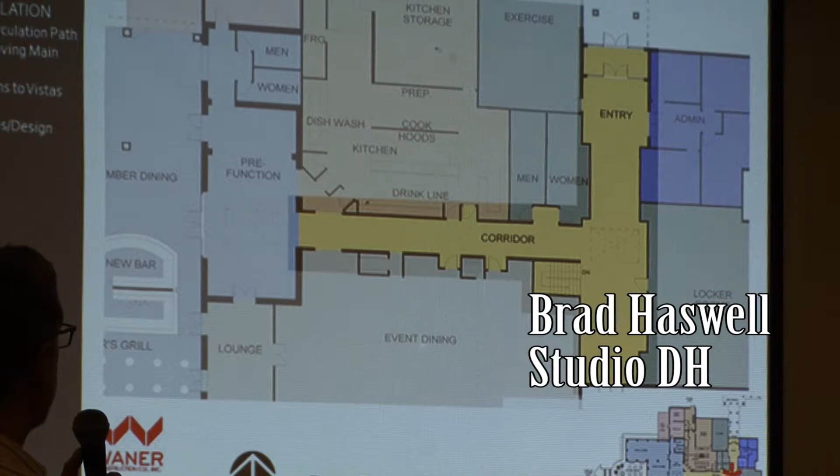The administrative areas: there's an existing coat closet here that we're commandeering and adding to the administrative area, since there's a need for another office or two. That space is also being pushed out into the hallway a little bit to gain a little more square footage.

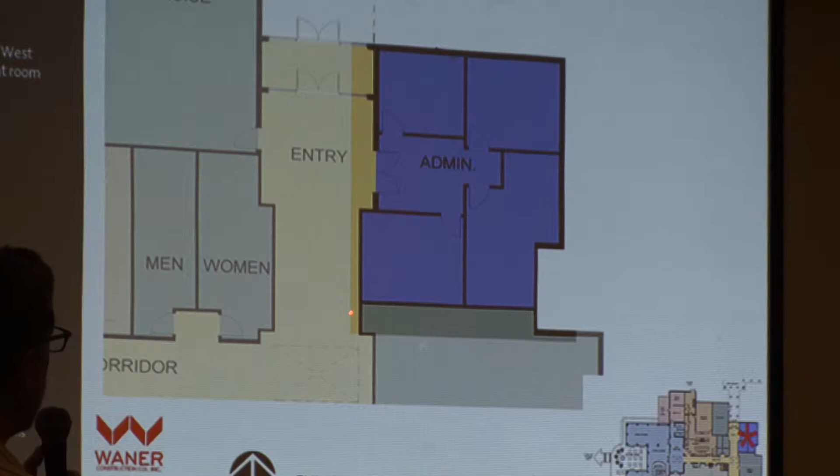The men's locker room: right now when you come in the front door, there's a hallway that goes out towards the pool area, and we're proposing to take that square footage. That door and hallway tend to not be used very much, so we're going to use that space to add to the locker room - additional full-size lockers, additional half-size lockers, as well as reworking the shower and toilet area.

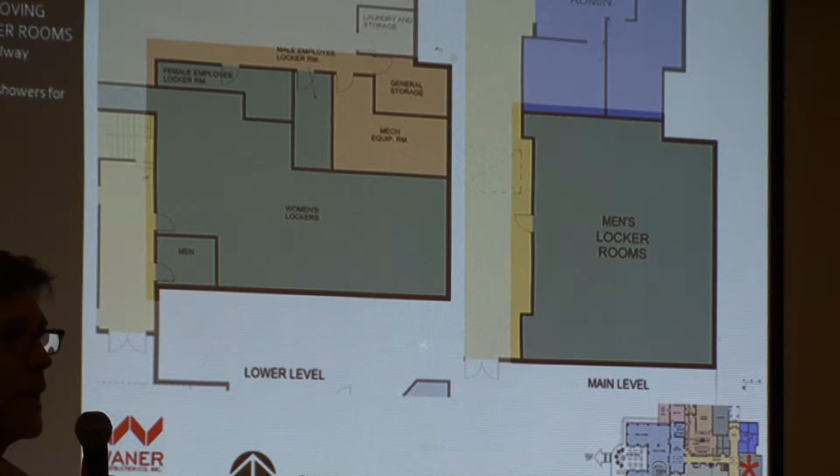Everything has to be brought up to code. We have ADA and handicapped accessibility requirements, so all of that will be brought up to code and meet current ADA standards.

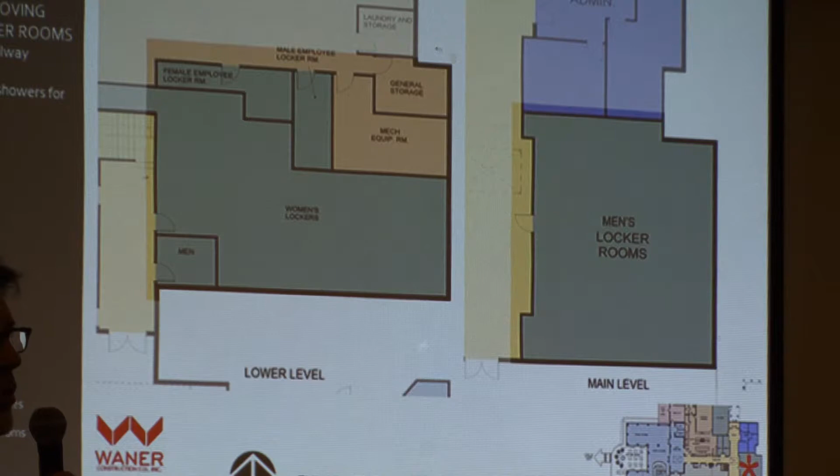In the women's locker room, some renovation has been done recently, and what we plan to do is build on that. In general we want to add in this area, and the big complaint we heard is that there's just not enough lockers in the women's locker room, so we're going to expand that area and get more lockers.

And then back upstairs, this is the exercise room we're in now. It'll have new athletic flooring, mirrors, and we intend to fill that space up with exercise equipment. It's a decent size exercise space that I think will function really well.

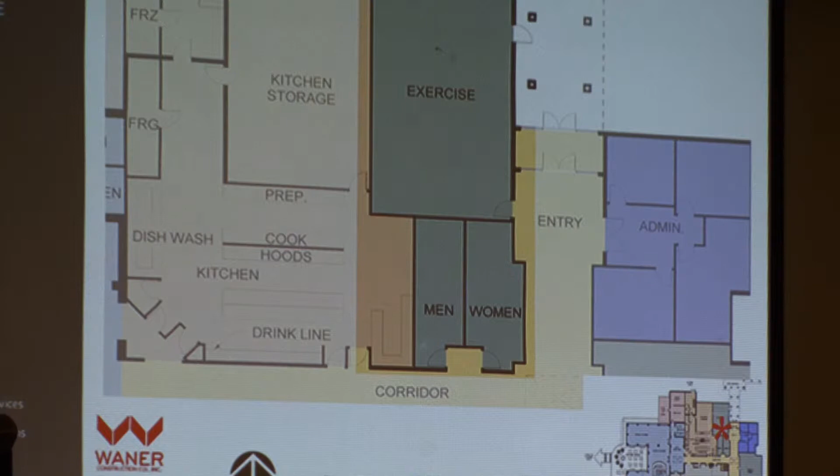I should also mention that as part of that, these restrooms will be enlarged. Right now they only go back to about here, but with all the additional dining space, we need additional restrooms. So this is one area we're doing that, and you'll see another spot where we're adding restrooms as well.

The event dining: this is now being opened up, and we feel that space has plenty of room to accommodate 200 plus people, plus a stage, plus an area for a dance floor. Part of how we're doing that is the porch that now extends to the south - we're planning to enclose that and capitalize on that space. This area over here can also be used if additional space is needed.

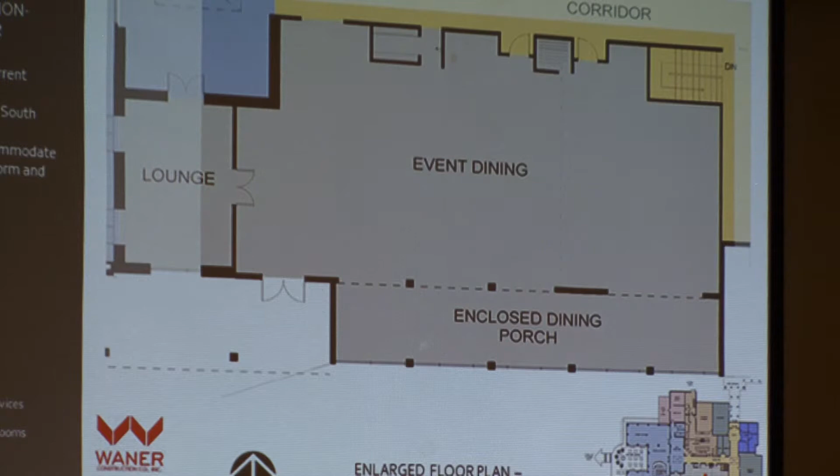This is the kids area we talked about before. We're proposing a game area and just an open play area, and then to the west is an outdoor play area with a fence. That can be directly accessed from the member dining area right here.

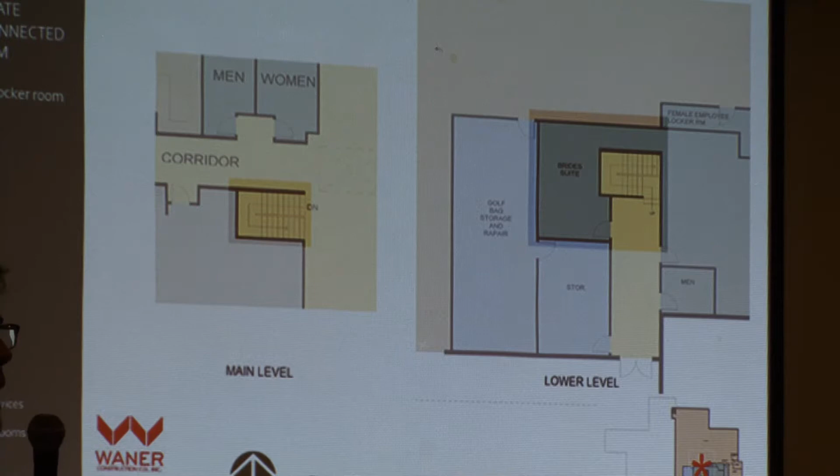Downstairs, the other thing associated with the women's locker room is this bridal area. We're capturing space downstairs, and as part of relocating that stair, it bought us a little bit of square footage. So we have this bride suite area with its own entrance off the hallway, and it also has direct access back into the locker room - we felt that was an important amenity.

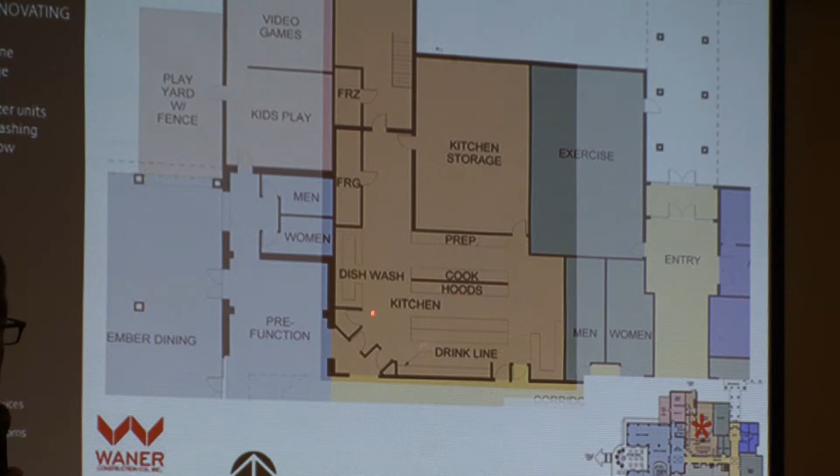What we've been hearing is that when there are multiple events - if there's a wedding happening and member activities going on at the same time - the kitchen couldn't keep up with the demand of doing both. I think this will vastly improve that situation, not only handling more quantity of food, but we hope we're able to keep providing the great food they do. So there's also additional dish washing area in here as well.

So here is the whole member event space that we're talking about on the west side, and a lot of time and thought has gone into this to this point. This L-shaped piece here is that existing covered patio that you guys have on the west. So what we're proposing is to enclose all of that space and capture that as year-round space to be used for dining.

Then in this middle area here, you come down the hallway. I should also mention that dark area you see here is the old ranch building. We are keeping that, and I know it's been a challenge to figure out what to do with that space in the past, but we feel it works great as a pre-function area into this member dining and bar area. We still maintain some of the old character, those old wood beams. We think it's great to hang on to that.

So we pass through here. We are proposing a new skylight in here to brighten that up a little bit, and come into the member bar area and directly out. These walls are movable walls, so in the summer, when the weather's nice, that entire wall can open up and feel like it opens directly to the outside. We've got those here, here, here, and here, and we really want that space when it's nice out to really open to the outdoors. I think that's a fantastic benefit of this space.

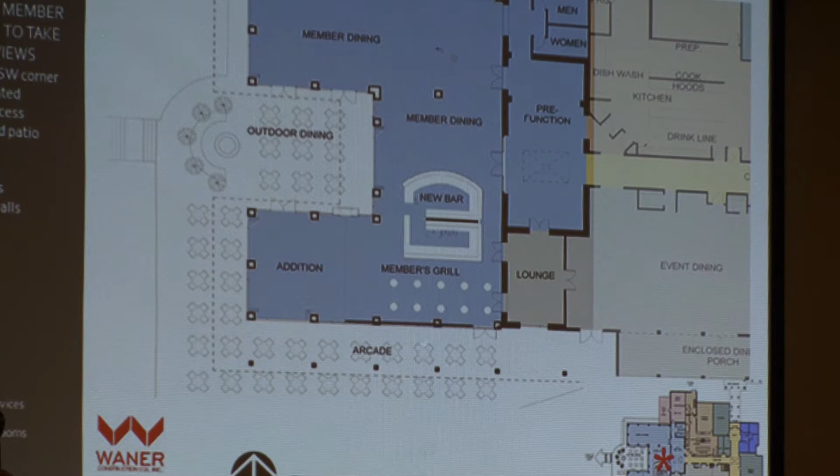And then at the very end of the circulation, we are proposing a fire pit out here. You'll see in some of the renderings we've got lights that span across there, so this will be a fantastic place to hang out in the evening as well.

So here's some of the images of the inside that we're proposing. This is, I guess you'd call it the southwestern portion of it, and this is where we are proposing the addition. So all of that area is new, and we're expanding that out to the west.

So this is standing - these little key plans I know are small and hard to read, but this is from that back corner looking at the bar and out to the west.

So we're building on what you have, so we are proposing adding these beam structures with an arch. We've got lots of arched windows, so we like building on that, and we think it's going to add some character and some depth to this room.

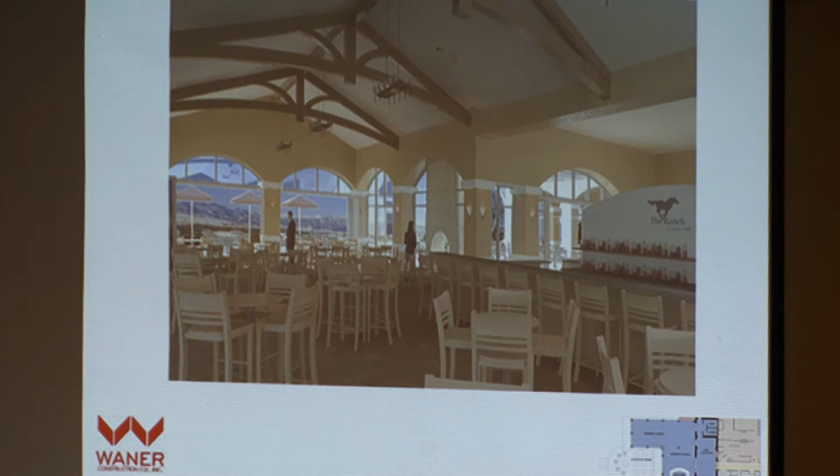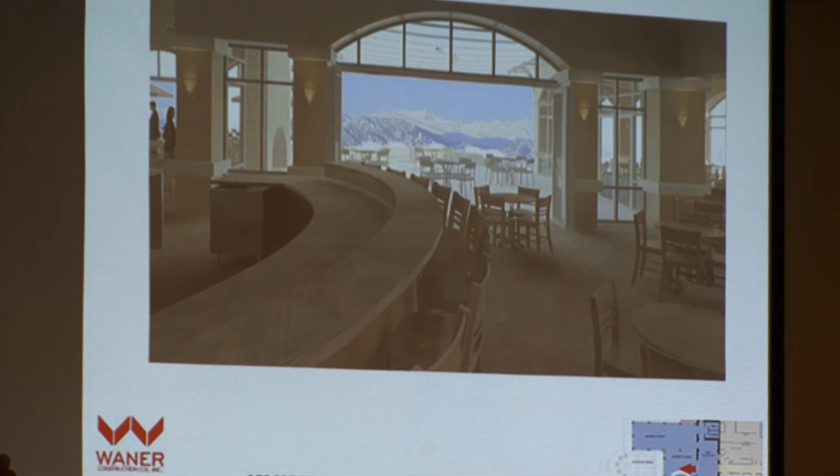So this view - these little keys down here are helpful. This is from the center, as if you were walking down that hallway and had just gotten through the old ranch building, looking through the bar area out to the outdoor seating, and there they are - those fantastic views that you guys have to the west.

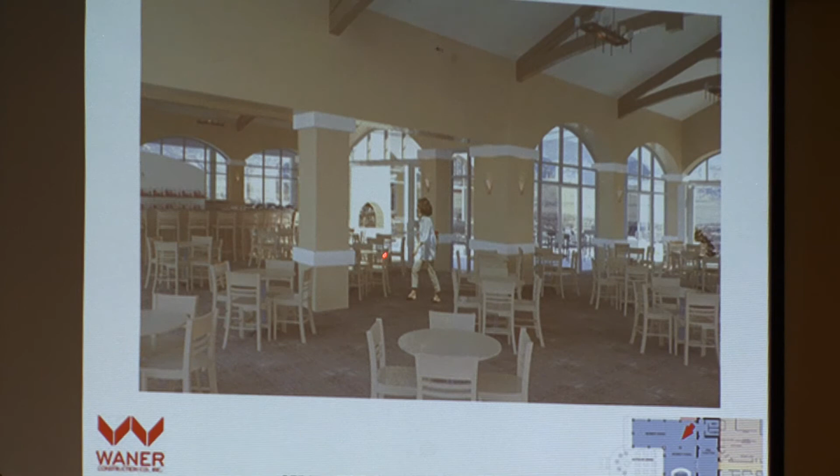Another view, this is from the kind of northern portion, so this is more of the member dining room looking back to the bar, and again looking out into this outdoor courtyard. We are proposing a fireplace that opens out onto that courtyard.

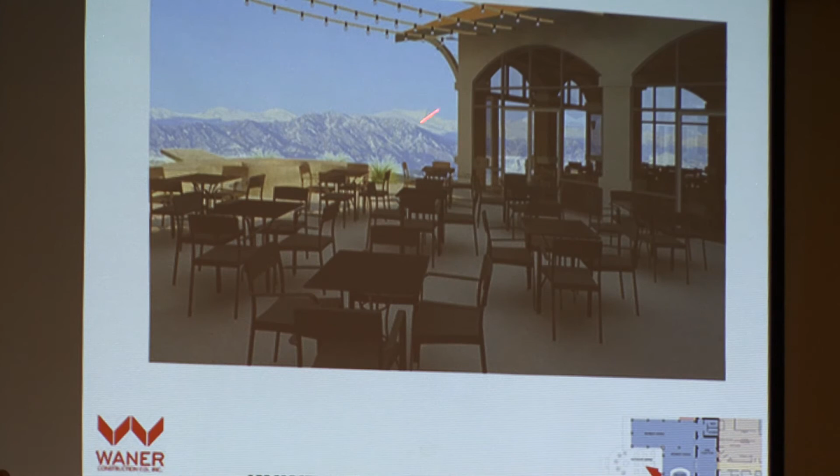And here's another view of that courtyard. So we're showing lights spanning across the top, seating, and there it is - your million dollar view. So this is the view looking back into that courtyard space.

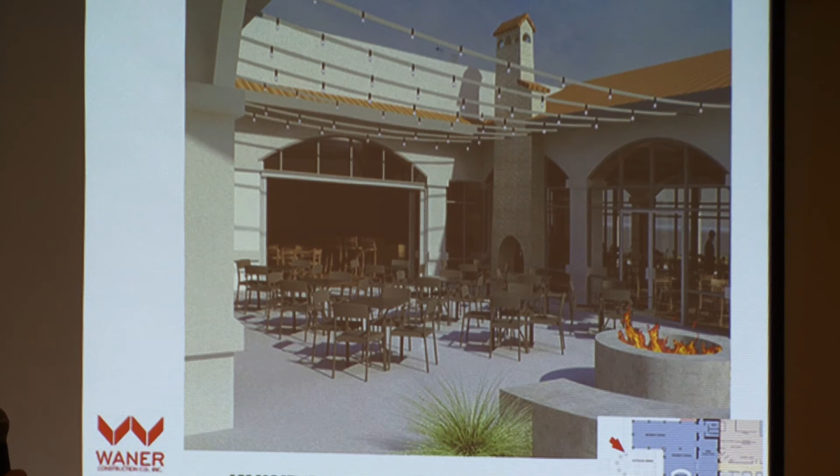Here's that fire pit that I mentioned before, and here's the fireplace. Again, these are these big movable partitions that open out and give you direct access to the outside. We really think that's gonna enhance that space.

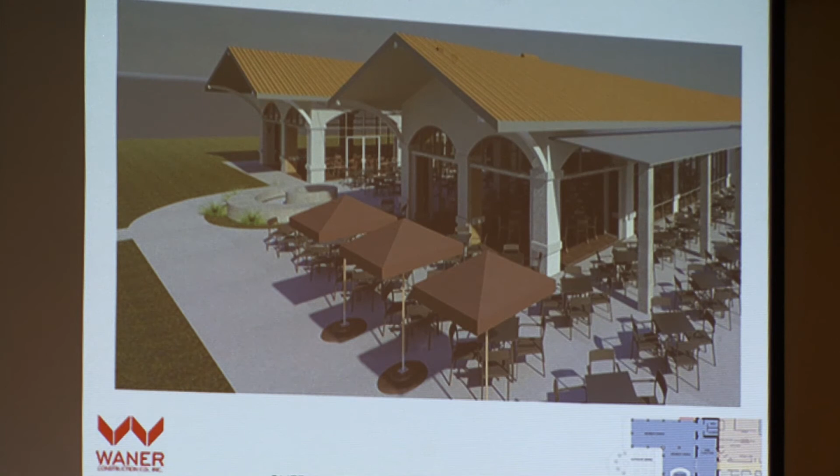So this is a view, kind of an aerial view looking back at it, and you can see the extent of the outdoor seating and outdoor dining that we have. So there's that whole courtyard, here's the fire pit, and then wrapping all the way around - this is a new covering that we're proposing on the side for shade on the south side.

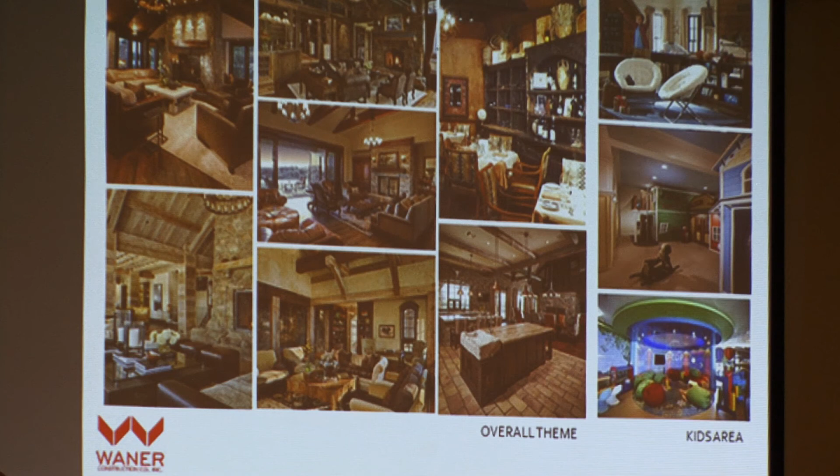Then the other part of this that I need to mention, and a fairly significant part of this construction budget, is what we call FF&E - that's furniture, fixtures, and equipment. Here's some examples - these are not necessarily exactly what we're proposing, but this is what is going to contribute greatly to enhancing the theme of the building. So if we're going after this ranch style, we're going to use light fixtures, furniture, and tables in a consistent way to build on that ranch theme.

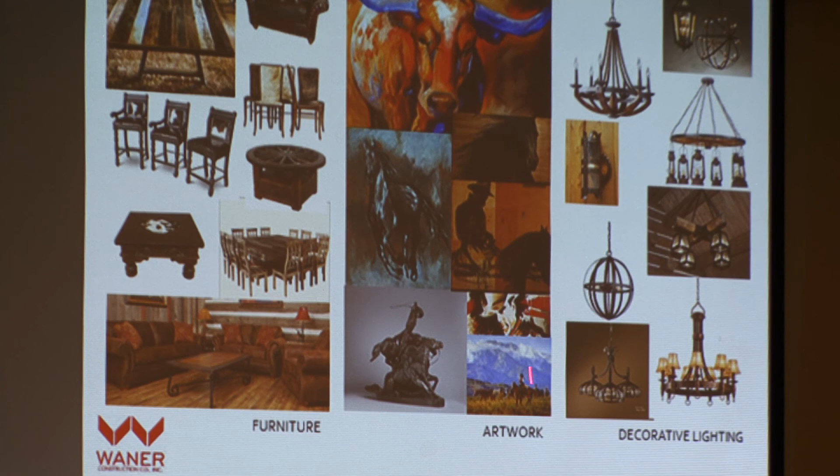So again, it's furniture, it's artwork, it's decorative lighting, and it's that whole package. So that's it - do we want to take any questions on design, or just move on?